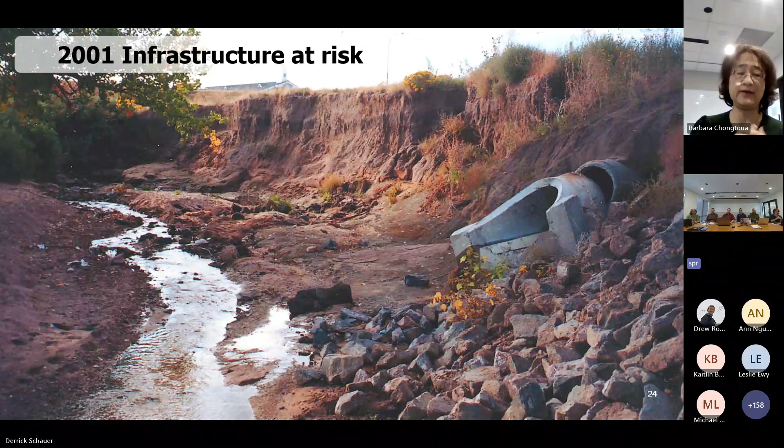But as you'll see in this next slide, by the early 2000s, late 90s, we started to see some erosion surfacing on Marcy Gulch, which resulted in infrastructure at risk shown here. As the channel lowered, and Troy's going to speak to this in a little bit, it lowered first, then it widened and started to stretch out. It started to threaten property, both public infrastructure like trails and utilities, but also private property. You can see the homes, although set far apart from the creek, are still close to it.

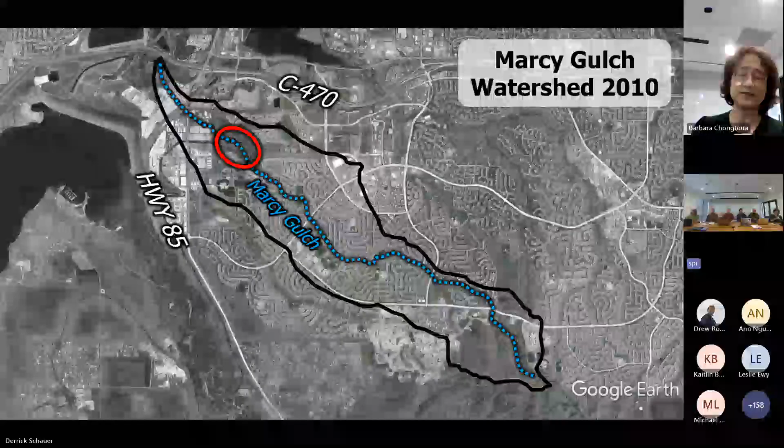You'll see in this next slide, we saw these early symptoms early on, but in 2010 everything kind of came to a head, in this area shown in red, after a significant period of rainfall. In this next picture, we basically lost the channel.

With the channel, what happened is with that storm, it cut down and it widened, resulting in a channel that really was no longer prepared to continue to convey floodwaters. You'll see in this next photo that a lot of infrastructure was lost related to this. The High Line Canal is that flume you still see standing, although it was damaged and wasn't operating as a result of the storm.

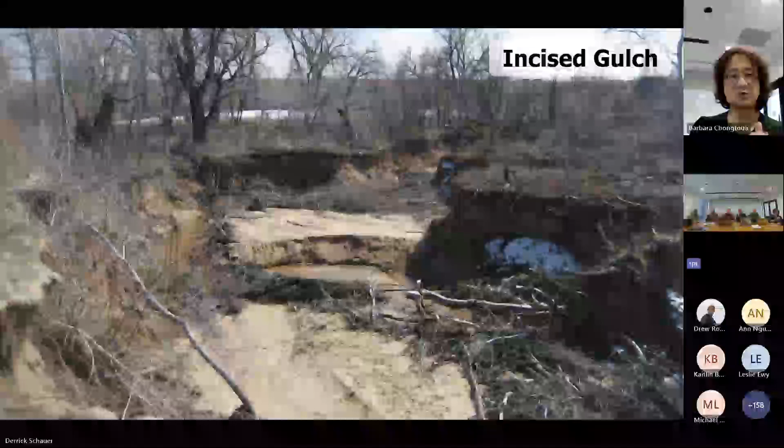You'll see in this next photo that we did lose vegetation because of this incision. You can go to the next one with uprooted trees, and then the next one as well. With this event, it moved even closer to private property.

We did take action and address this problem, but this is the watershed responding to increase in density, more people, and increase in how people are creating habitat in the watershed, which brought in more driveways, more rooftops, more roads, more imperviousness, which means that Marcy Gulch, which didn't experience many flows in its historical setting, now was seeing flows with every summer thunderstorm that was coming through.

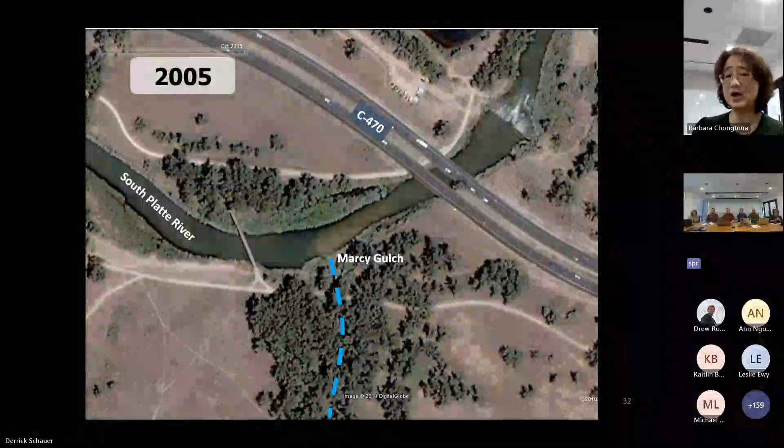You can see with this next photo that this really came to a head. South Platte River kind of told us the story of Marcy Gulch, because you can see the chocolate milk there at where Marcy Gulch ties into South Platte River. In 2005, you start to see some chocolate milk, which is an indication of mobilization of sediment due to erosion in the Marcy Gulch watershed.

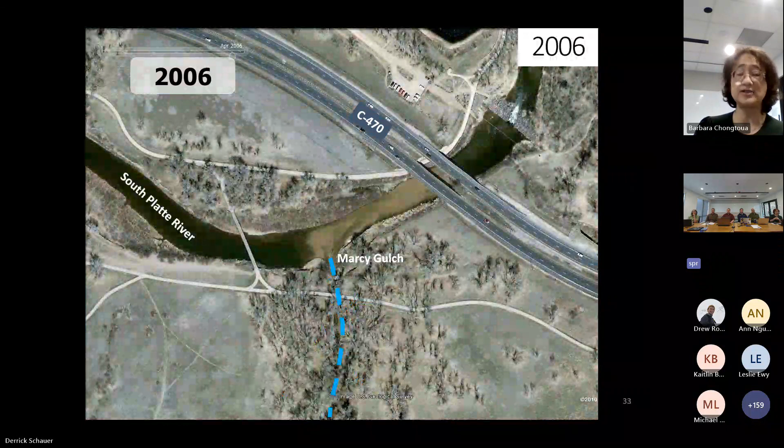Progress through the next two slides, Derrick, you'll see that chocolate milk in 2006, and then in 2008, very significant. Again, some behaviors of this watershed telling us, hey, I'm changing because the watershed's changing, and I'm changing, and actually I might not be able to handle the conditions that I'm put in.

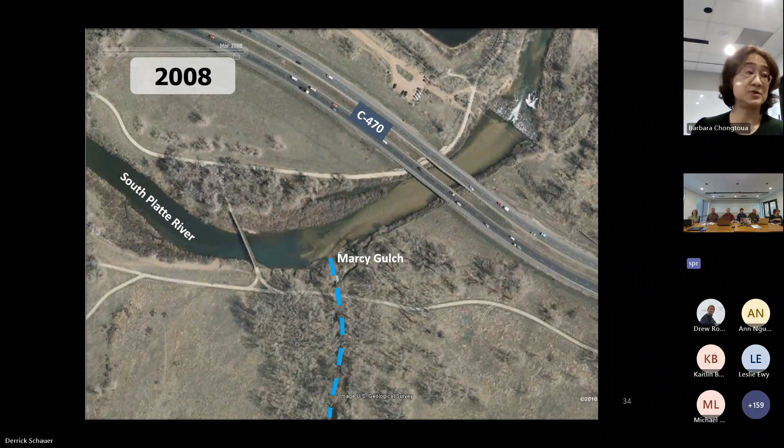So this next two slides, some of the things that we think about with floods, I just want to point out two ranges. There's the range of events where we experience it every summer. Our typical summer thunderstorms, we all experience it here. We know what those are.

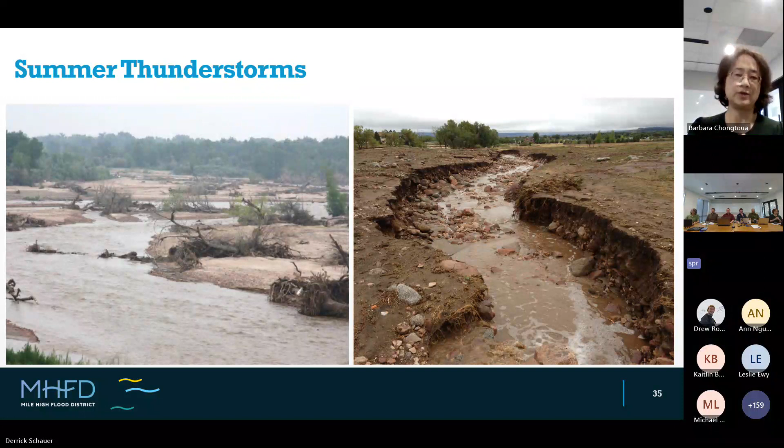When you go to the next slide, I just want to highlight that with Marcy Gulch, the green is what it historically saw as a peak discharge for a typical summer thunderstorm. In other words, it was very unnoticeable. The minute you put roads in, more driveways, more rooftop comes in, the peak discharge related to a typical summer thunderstorm increases 50 times. And this is just in peak.

It also occurs more often. It also occurs longer. It also occurs more year-round than it did before. And this is why the watershed changes result in the stream responding, because now it's seeing a condition that honestly it never had experienced before. These are the summer thunderstorms.

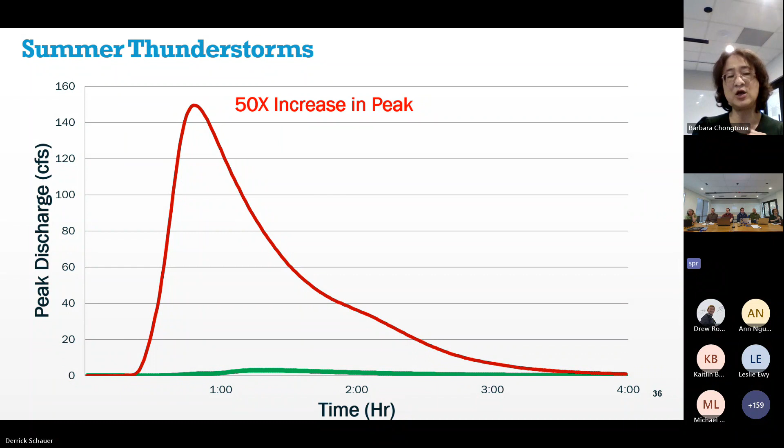If you go to that next slide, you'll see for those events like 2013, 2015, last summer where we had a lot of rainfall in May and June, those floods that impact or cause harm to property, or those that are life safety issues, as you can see with this next graphic, goes up twice. So comparing the green to the red, those events go up significantly as well.

That is why our streams in urban areas are kind of finicky. They're a little bit sensitive. And that's because they are now brought into an era where they haven't experienced this in their geologic past, and now they're having to adapt.

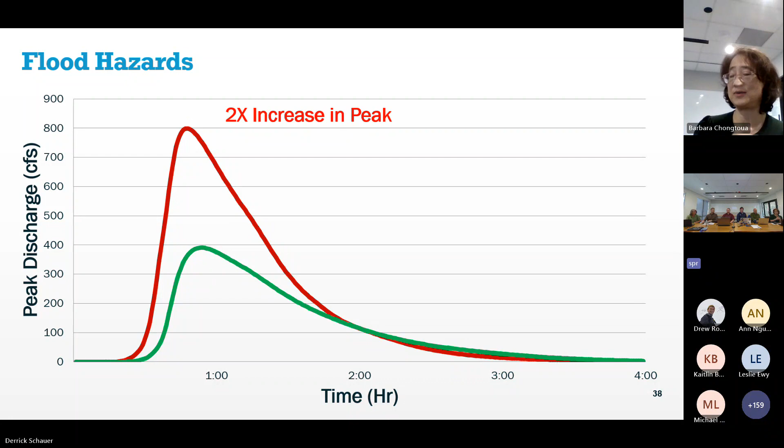So I think with that as the foundation of talking through urbanization and what that means, how the natural environment starts to respond to that urbanization, I think most important and why you're here today is let's talk through, well, how do we prepare our watersheds for this change? Because this change is going to happen. How do we help it prepare, and how do we mitigate for these changes? So I'm going to kick this off to you, Mary, to talk through that.

Okay, do we want to pause and answer a question that came in really quick? Oh yeah, please, Laura. So Cody wrote in that climate change, development standards, lack of master planning were the results of Marcy Gulch, purely due to the increase in impervious cover, or were some other mechanisms at play? The results seem drastic for the size of the watershed.

Yeah, I think, and good observation, Cody. I think for Marcy Gulch, there was a master plan that we had followed with that particular watershed. I think the one thing, a couple of things, and if Jim Wulliman were here, I'm going to be Jim Wulliman with Muller Engineering for a little bit.

I was very intentional in saying flood control facilities. The practice at that time was really peak shaving, meaning you're reducing the 100-year event. We're lucky if we're hitting the 10-year. I don't think in this watershed we even have 10-year control, we have basically 100-year flood control facilities, which meant we were managing the 100-year developed condition back to the 100-year historic condition. But any events smaller than that were allowed to increase, so your 10-year was significantly higher, your 2-year was significantly higher. Marcy Gulch experienced those larger events for the smaller, more frequent storms. The one thing we did mitigate for was the 100-year, but that wasn't enough. That's part one, and that's why we now have full spectrum.

Full spectrum detention is where we are managing all of the events to its historic or existing condition. That's part one. Part two, Cody, is that the approach for Marcy Gulch was regional detention with some grade control structures, but we generally stayed out of the gulch, thinking at that time we were doing the gulch a favor by not putting in a lot of armoring and structures. What we learned from Marcy Gulch is it's a sandy system, it can't handle a lot of water. Even though we're providing detention for that 100-year event, we're allowing all the other events to hit the system raw, and without much infrastructure in Marcy Gulch, it unraveled. That experience with Marcy Gulch has informed our standards today.

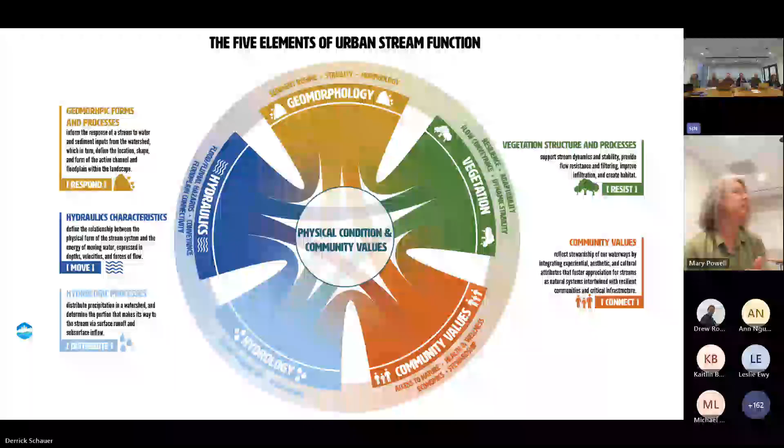And then finally, vegetation as a very important aspect of stream function, and ways that vegetation can work in projects that hadn't previously really been considered. And so I think the first... Do you want to touch on the honorary 6th element? Mary just mentioned that in preface to Brent, the multidisciplinary team. Oh, sure. Thank you, nice segue. As part of recognizing this new approach, we recognized as well that in the past we had engineers on design teams and a lot of planning teams that focused on the H&H.

As soon as we started talking about community values, geomorphology, vegetation, we very quickly recognized that we needed to bring more people to the table during the planning process, during the design process, and even during the construction process. And so that recognition really led us to stressing the importance of high functioning teams as well, not just streams, but high functioning teams through a multidisciplinary approach. And Brent is going to take you on that journey here now.

Are you ready? Later, he's... I'm gonna talk about it later. I know, I'm sorry. It was a really nice segue though. It was. I had it in mind for later. Yeah, it was really nice. What we're going to do right now is take a little break. Do you want to do it now, Laura, or do you want to wait? Whenever you guys, we're only half an hour in, so if you'd like, we can go a little bit longer. Sorry, no break for you.

All right. So I love this image. This is right around the National Western area. You can see the old wastewater plant in the foreground for Denver there. Now, this area has changed. I want to say this image was in the 30s. And I love this image because it illustrates some of the points that I love to make about urbanization and about how our drainage infrastructure adapts. And of course, there's been a lot of press around the South Platte River these days. Some of you may even be working on this area of the river now.

What I love to see here is this is again illustrating that definition of urbanization, which is, the first part is you've got more people moving into an area, and the second part is how we adapt. How do we manage our world around us to adapt to more people? And so you can start to see things like roads and railways, and in this case, all of the stockyards in the foreground. So what does that do? Well, we've straightened our rivers. You can see in the foreground, we've channelized and straightened, we've smoothed things out. We've completely changed the way the South Platte River was working. And so that means that we are adapting our natural world around us to help us with the urbanization.

Yeah, go ahead. Go one forward. There you go. For all of you out there in the audience, we had clicker problems. So Derrick is our official clicker here. Thanks, Derrick. You do a great job too.

But again, going back to this idea, and you can make this one quick, the idea that the more we urbanize, the more we're managing, and the more we manage, the more we urbanize, because people are attracted to that, and it just kind of cycles into this loop. Go ahead to the next one.

It depends. Yep, good. 25, 30. 50 years. I see a 50, 40, 30. Nice. Excellent. You guys, you're in there. 30 is the closest, to be honest. Yes, there is some infrastructure that can survive 50 years, but let's say it's 50, just to be positive about this.

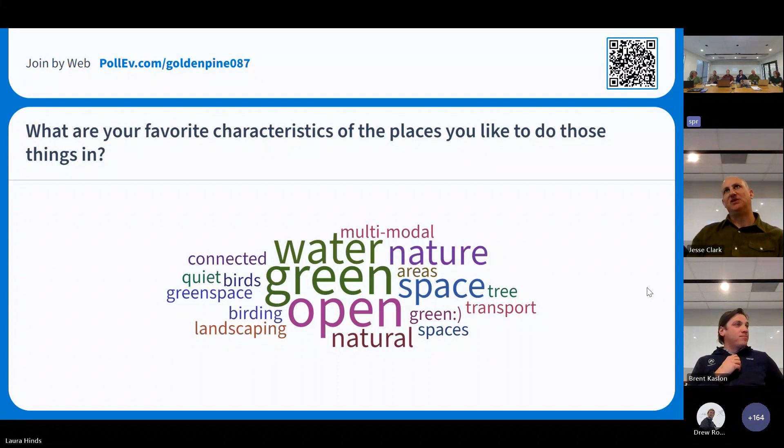So the next one is about stewardship. Hopefully. There we go. So what kind of things make us want to take care of those places? And my guess is that it's going to be related to the fact that you want to preserve those very characteristics that you just described. Community, nature.

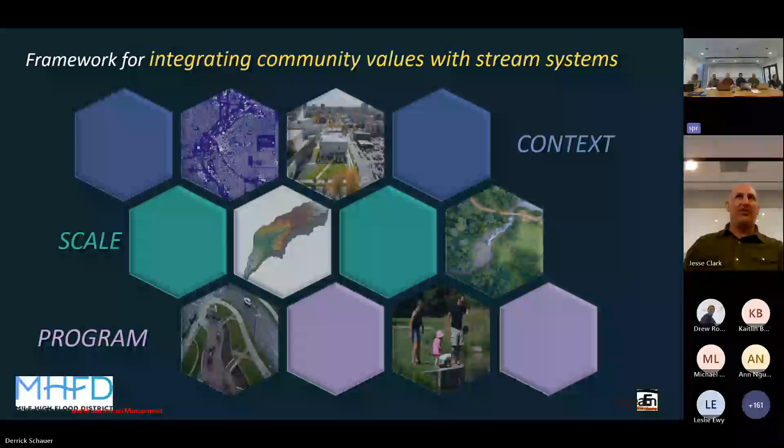This is really an important way, and I also want to apologize. Some of the colors came through really funky on my slide generation, so it might be hard to determine these, but I like to use these 3 buckets as a matrix for things that you're balancing when you're considering how you're planning for space, how you're designing for drainage infrastructure, and how we're essentially implementing urban infrastructure to carry water through our communities. The first is that idea of context. The second being scale, how big or small, and the third being program. So go ahead and go to the next one, Derrick, if this works.

Okay, good. So context really speaks to a lot of things, right? And I want us to start thinking about it's beyond just roads. It's beyond just about how we get through it, although it includes that. So transportation, access, circulation, these are really important things. People like to move from one place to another. It's also about our architecture and aesthetic. It's about the materials that we're using and the forms.

I recently just got back from Cuba, actually, and I can tell you that there are just some amazing contextual cues in Cuba. Despite the condition of much of its infrastructure, there are these beautiful aesthetics that really inform all of their infrastructure. And that leads to the demographics, right? A lot of different people using our places. So it's important to consider how we're using land use, density, what kinds of things are already there. Existing program is a really important one for us to consider when we're developing new infrastructure that might support or feed into that existing area.

Next one. So when we're talking about scale, we can think about scale in a lot of different ways, right? It can be related to just the waterway, whether it's a first-order stream, this tiny little trickle, or all the way down to a large river. But we can also start to think about scale in terms of our demographics, in terms of our development patterns, right? Rural, suburban, and urban or ultra-urban development.

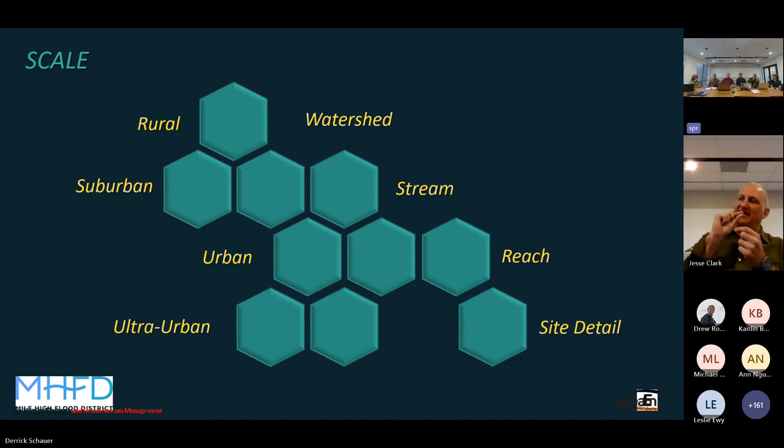There's a completely different scale of both the objects in space, buildings, the scale of our roads, the scale of our infrastructure. All of these things are important to consider when you're thinking about whether we're planning for space, right? Are we reserving enough space for all of that to happen? All the way down to the details of every nut and bolt or finish of the concrete that we're talking about, or the craftsmanship of the masonry that develops into a wall or an outlet structure or something like that.

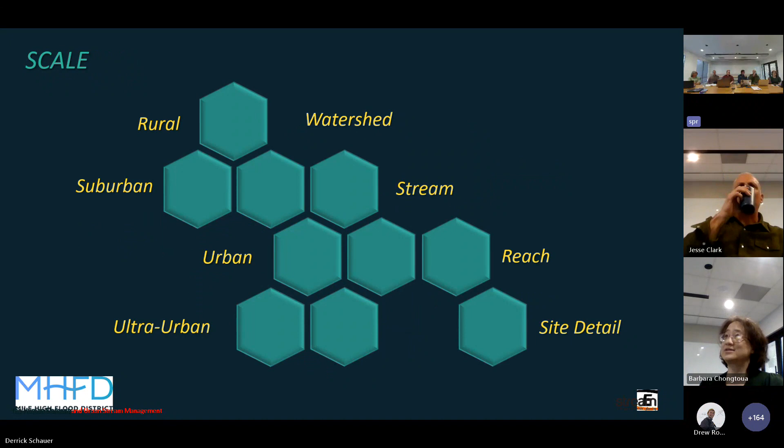Okay, next one. Can I just add a point there, Jess? Please do. I know working with my Denver Park friends, as well as my Adams County Park and Open Space friends working on projects, especially along the South Platte, this question of scale comes up a lot because, like in Adams County, the question of, okay, we're doing an improvement to the South Platte River, but it might actually be considered a regional park. It's a regional destination.

And so therefore that informs, and here we're talking about a stream restoration project. We're having this conversation of what is the purpose of this improvement. And it's going to be a regional park and open space. And that informs the type of amenities that we might want to include to make sure that we're meeting that marker. And so I think that's, to your point, Jess, where scale comes in.

Like in the South Platte River, in the Denver piece, with my Denver Park friends, that same discussion comes in: it might not be a regional location, but it might serve as a neighborhood park, an open space, which informs, again, the scope of design. So I just wanted to illustrate what that point means, even when it starts out as a stream restoration project. And that's typically where it starts out, but I just love the conversation that Jess takes us in, is really, what is it first and foremost to the community? Yeah. And it's not a stream restoration project to the community.

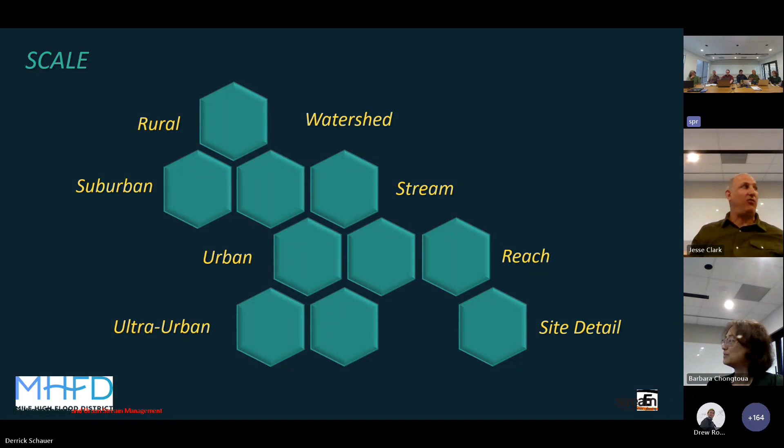Yeah, and I know we're going to touch on this more later, but the number one thing that we're seeing related to scale, it's not enough space. We're not giving enough space to this kind of infrastructure so that we can allow for all of these other functions to occur. If we don't allow for that, then we're already boxed in. And so I know we're going to touch on that later, but you go to the next one.

Thanks. So program, we hit on this a little bit, but I also characterize this into 3 different ways: active, passive, and indirect. So active program, this is like you're actually bringing somebody to a program and you're actually asking them to act. It could be as simple as they're asked to do something, complete a survey, kick a soccer ball, whatever it is. You're actively participating. Passively participating in something is, I saw people were talking about birding, hiking, those kinds of things. You're engaging yourself into that area or that part of nature, but you're passively experiencing something.

And then there's the indirect. It's almost like the piece of experience that you don't realize you're experiencing, but it is still impacting you. These are things like, it could be lighting, it could be the smell, it could be the temperature, right? You could come up on something that just really doesn't feel good and you don't even know why. So these are just big buckets to think about program. Go to the next one, please.

You get precipitation in a condition like this, which we're going to call the natural condition, with a lot of vegetation, trees. That precipitation is then captured through interception on the leaves or depression storage.

If there's little undulations within the environment, you get that depression storage. Evapotranspiration is another big one where the plants use the water and it evaporates through their leaves. Infiltration is a really big one with natural environments. When you get that precipitation, it slows everything down before it gets to a stream corridor, infiltrating that water, providing deep percolation and groundwater recharge. But in the case we're looking at today, it's really about the runoff. That surface runoff is reduced when you have this pervious area.

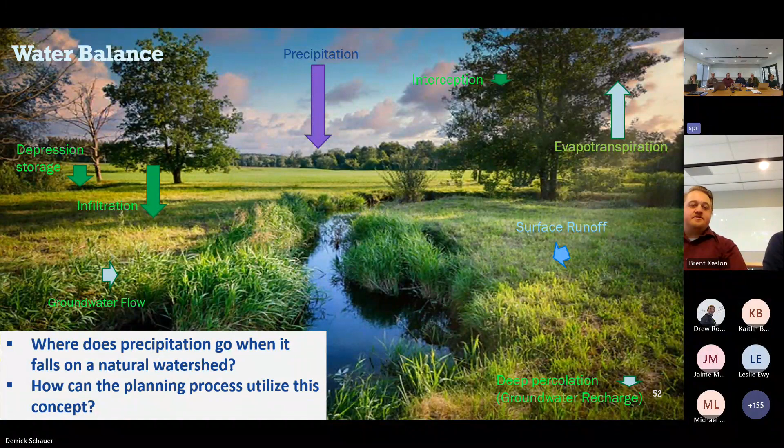You don't have to answer these questions in the chat unless you want to, but these are the things that as a water resources engineer I'm thinking about when we start looking at a development or a project. Where does that precipitation go when it falls on that watershed? And how can the planning process utilize this concept? This is where that multidisciplinary team and getting all of these other experts in the room, that question can be answered.

So then when we transfer and start looking at urbanized areas, what are the results of urbanizing an area? You have that same precipitation, but reduced evapotranspiration and reduced depression storage potentially because you don't have the vegetation there. When you start covering the landscape in concrete and these impervious surfaces, you're reducing that potential for infiltration, evapotranspiration, all these things that slow down the surface runoff.

And then on the flip side of that, all that precipitation turns into surface runoff. As Troy mentioned earlier, it's not just the peak flows, but it's the volume. You start getting increased volume for smaller storm events, and then you have to really manage that increased flow.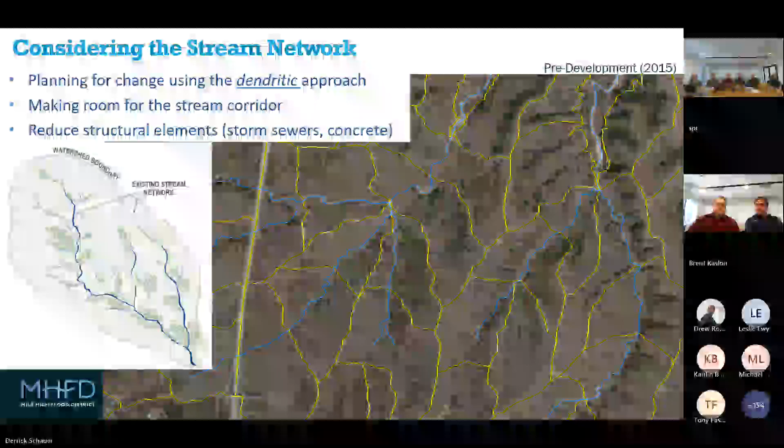Go to the next one. This is that same photo, but partially developed. So you can see what this area is turning into and what the watershed is turning into.

One thing we were able to do here, working with the developer, was preserve those stream corridors and utilize the topography in this area to help with drainage. Those blue lines you see are generally undeveloped, and we've kept those in place and modified them as needed.

Brian, those are mostly intermittent or ephemeral streams, right? So the point being they weren't just overlot graded. Yeah, absolutely, these are intermittent streams that generally only run when they see storm events. But the frequency of those events is now going to increase, since we've got increased impervious area from the roads, houses, and developments.

So the next thing when you start thinking about the stream corridor itself is that horizontal shift, which is what Troy mentioned about allotting space for that stream corridor. But then the next step is really figuring out where that detention is going to be.

It's easy to just put a large detention facility at the lowest point of the property and kind of put it out of the way. But what we found is that actually leads to more consequences and issues down the road, especially for the upstream system that doesn't have any detention.

Yeah, and the last thing I'll say, then I'll turn it over to Troy—like I said at the beginning, this is a really important concept. Even if you're not the expert on hydrology and hydraulics, it's really important to know this, because then the next thing that happens is once you have an understanding of how water is being distributed throughout the site, it comes down to those stream corridors Troy's going to get into, and allocating that space and understanding from a geomorphic aspect where your conditions will change in the future.

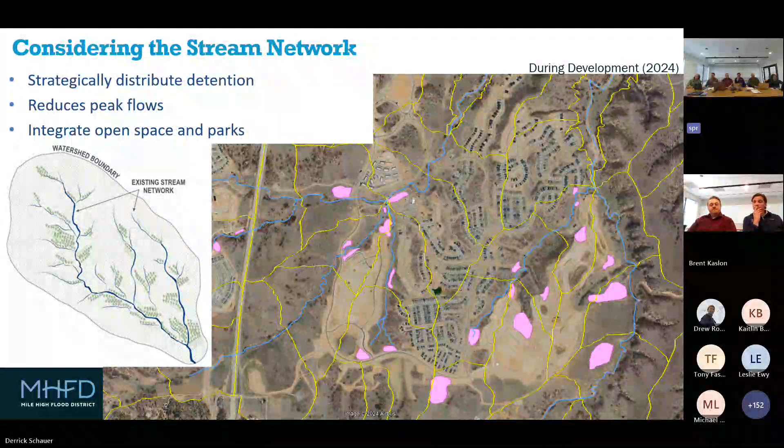We did have one quick question. Do you want to jump back to slide 53? Brian, they were asking—I'll just read it—in this urban situation, did this urban site include a solution where capacity needed to be expanded among the other design goals?

So this is not a project that I worked on, but I like this question, because what this shows is there is no space, right? So if there was a point down the road where you needed to expand the channel here, you don't have the room to do that without then taking out some other amenity, whether it's the plaza space or there's a little seating space over on the right side of the screen. So a perfect example—I appreciate the question—is if you go this route where you're not allocating that space within your corridor, you potentially end up in a situation where you're now having to remove amenities down the road because of the change in condition or the impacts of urbanization.

And I'll just add, Ryan, that's why we also then end up with a lot of buried infrastructure, because you've got more water coming in. You still have to mitigate that water. You can't have more water come into this creek here. That's where a lot of times we see underground detention crop up, because, well, how do we reduce the peak coming in so that we don't have a capacity issue at the channel? Not having the right amount of space everywhere just compounds the issue, because now you end up with unnecessary infrastructure littered throughout your watershed.

Yep, and Jeff asked, what about the depth of the channel? That's definitely an option, but you can only go so far, right? You can't dig out another 10 feet of this channel just to provide that extra capacity without potentially impacting something else, or then having to shift where you now have concrete walls. And then we're in the condition that Mary showed earlier, where it's a much tighter flood control system, and that's the only benefit you're getting.

And I would say that Jeff's question, that's definitely an 'it depends.' Because could you? Sure. With enough money, you can almost do anything, I suppose. But there might be existing infrastructure underneath the channel that you can't go lower than. There might be experiential benefits you're going to completely sacrifice by going deeper and narrower or having vertical walls. You might disconnect all of your vegetation from the natural hydrology, and so now you're either increasing the requirement for irrigation or completely obliterating any possibility for natural vegetation to exist. So again, it depends—it's those knobs and levers that you're turning.

And are there examples of lowering the channel? Absolutely. We're seeing it here in Denver. The South Platte River in some places is going to be lowered 14 feet or something like that, right?

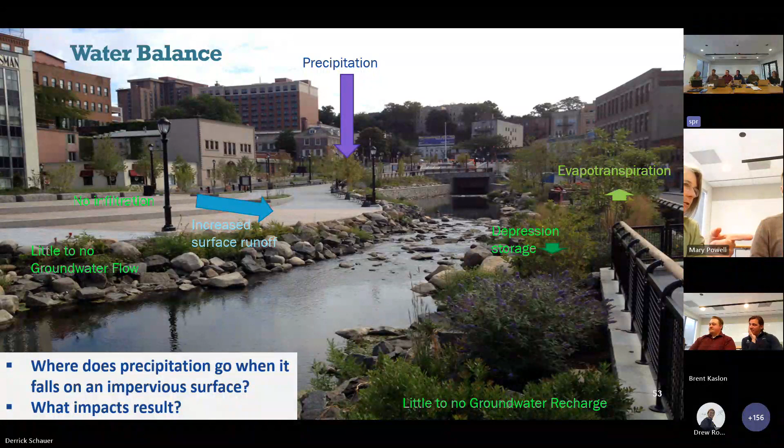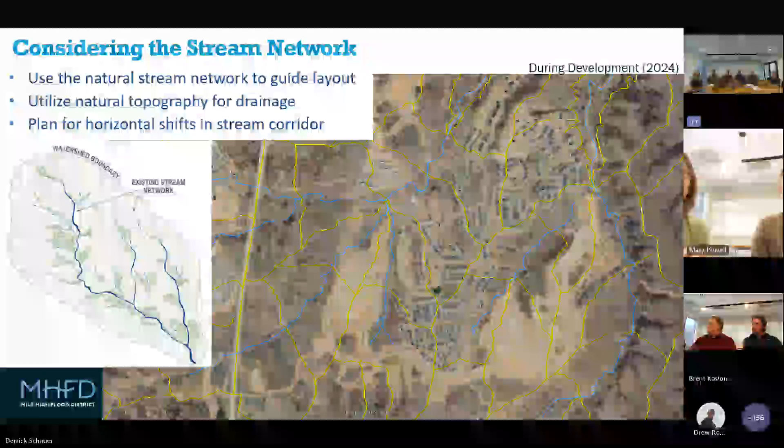One of the things the district is trying to work on is when we do get the space, we recognize that over time, additional stressors will be added to the system as development gets built out. But we're trying to come up with a way to only make those changes or protect those areas that are critical at the start. And then over time, we provide the opportunity to go in and be a little more surgical in addressing points of erosion. Instead of redoing the whole channel the way we used to, we're going to wait and see how it responds and address things as they go.

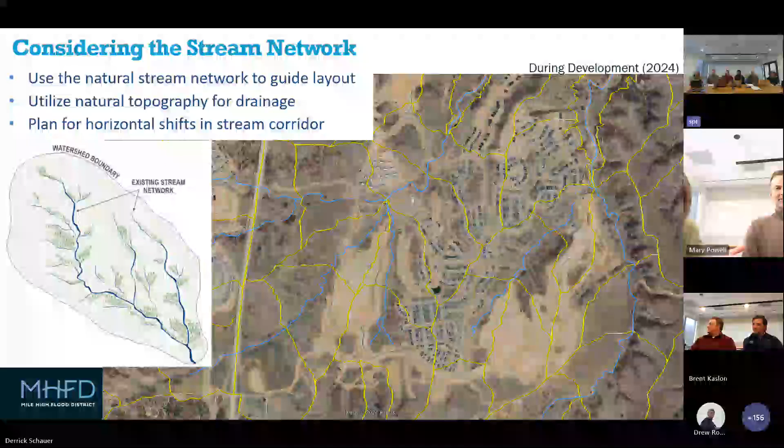So all these areas, we want to make sure we're really clear. We're not just giving it space and letting it go like Marcy Gulch. We definitely have an adaptive management plan in place that says if we see this, then we do that. Maybe it's a riffle structure, maybe it's a bank stabilization. At some point over time, maybe the whole channel does end up getting redone, because it just can't do without all that work. But let's wait and see a little bit, as some of our newer approach. So, yeah, that's it.

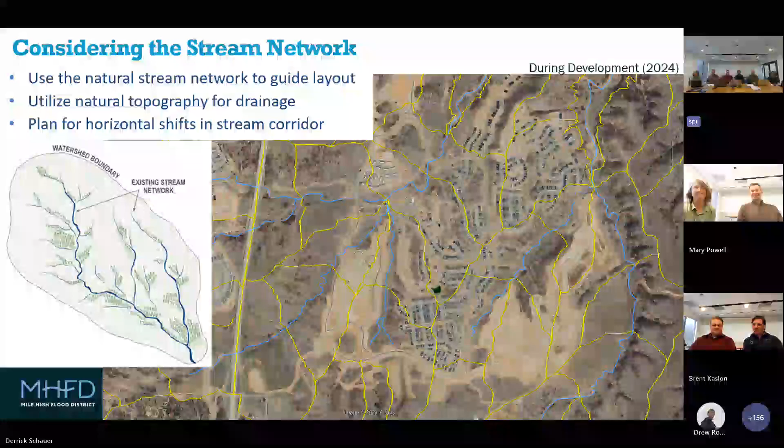Who's next? There is one more question. Do the planners, engineers account for the design storm event, the 25-year, the 50-year, the 100-year, when they do stream restoration? Yeah, so that's one of the things that we look at, and I think Troy, either today or tomorrow, you're going to get into this in more depth. But one thing that I'll mention about master plans, from an engineering standpoint, it's really difficult to predict the future with a master plan. Like I said, we have existing impervious values and proposed impervious values.

But a lot of times what we're doing in a master plan is we're trying to provide guidance on what that channel may need. That doesn't mean that the master plan is the solution, right? And I think that's really important to keep in mind: when you're doing a master plan, you don't know what's going to happen in 5-10 years. And a lot of times a new one doesn't get done for another 10-15 years, depending on the site. So understanding that it's guidance, not the solution, is really important. But those storm events are one of the primary things that we do look at.

And I just want to expand on what Ryan says regarding district master plans, is that we'll identify the problem and we'll identify the action or the intent to address the problem. How you get there is not prescriptive. So we might say we need stabilization, but we're not saying we need grouted boulder stabilization versus a concrete channel. I think that needs to be left vague so that it can be defined with time, because technologies and tools will change, to create planning documents that live on the shelf better. Thank you for bringing that up, Ryan.

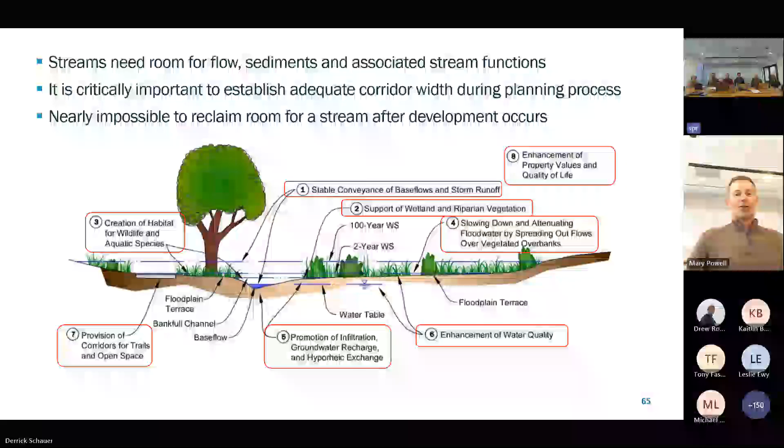All right, now we have sort of a different category, and these are more some of your environmental types of things. Over on the left, we have number 3, creation of habitat for wildlife and aquatic species. Some of the earlier photos you had seen of the reactionary concrete channels obviously aren't providing those types of functions, but they really are important for systems that we're trying to create. In the middle here, number 2, support for wetlands and riparian vegetation. Mary's going to talk about vegetation a lot more, but obviously there's benefit from active, passive recreation, from just stability. And so we need to provide the room to be able to allow that.

And then down in the lower right, enhancement for water quality. That's really an important function of a natural floodplain. So the more that we can mimic those by providing room for streams to act like streams, the better off we're going to be. Advance that, please.

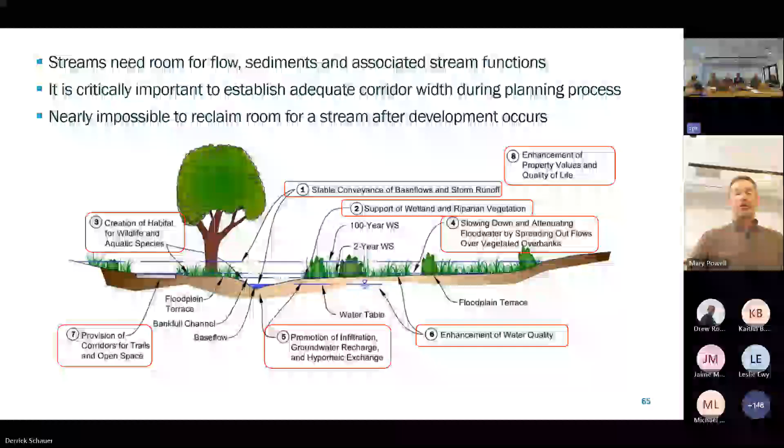And then lastly, we've talked a bit about some of the human element. Down in the lower left, number 7, provide room for, let's say, corridors and open space or parks. Those oftentimes coexist with some of your stream corridors, a great thing. In the upper right, number 8, enhancement of property values, quality of life. Ryan talked about how by creating these spaces, we really are creating something that has not just the aesthetic and emotional values to it, but there are some property values, quality of life type of benefits we get as well.

So the big takeaway I would have from this slide really is that the room is required for a lot more than just conveying water, and the more that we can think about that in the planning process, the better off we're going to be. Next slide, please.

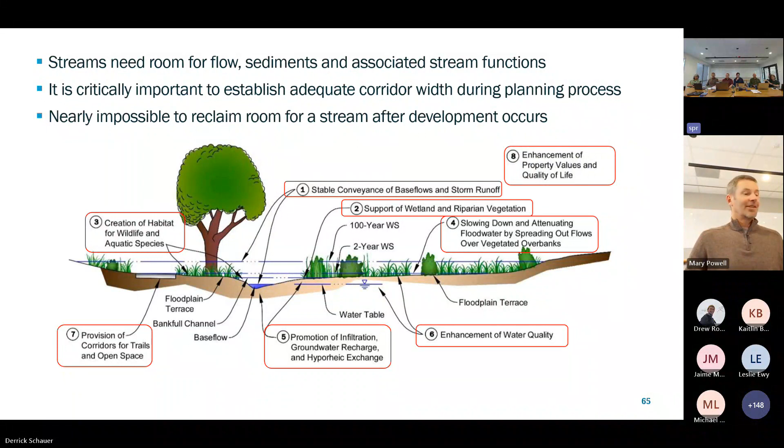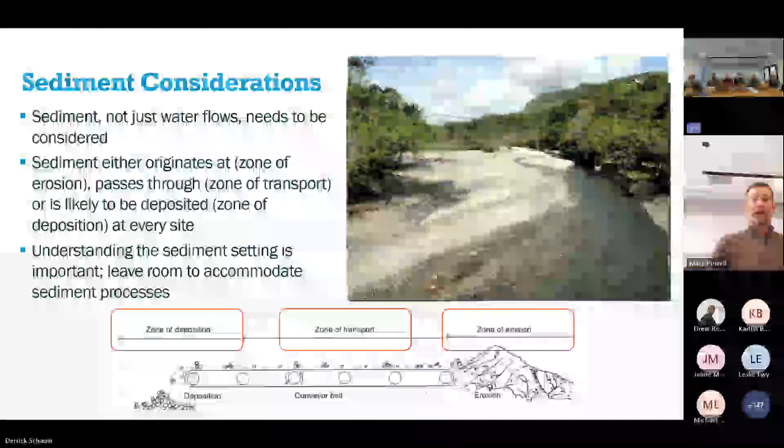There'll be some of both of those, but generally the sediment is moving through. And then advancing, please. The zone of deposition. And so this is the area where you're actually seeing a lot of direct responses from your sediment. So the sediment that's being transported from upstream is going to be dropping out. You might think of alluvial fans, but you can think of those on very small scales as far as, in a lot of developments, the downstream end, oftentimes you're going to see areas that there's a tendency for sediment to want to drop out. And an important piece in planning is to just understand where you are in this conveyor belt so that you have a reasonable expectation of what the system is going to want to do.

Next slide, please. Do we want to provide a little space for questions? For anyone who has something they just have to get off their chest before we move on? I do just want to say, did someone chime in or was that? Well, it might have been you. Okay. There was, but feel free to go on.

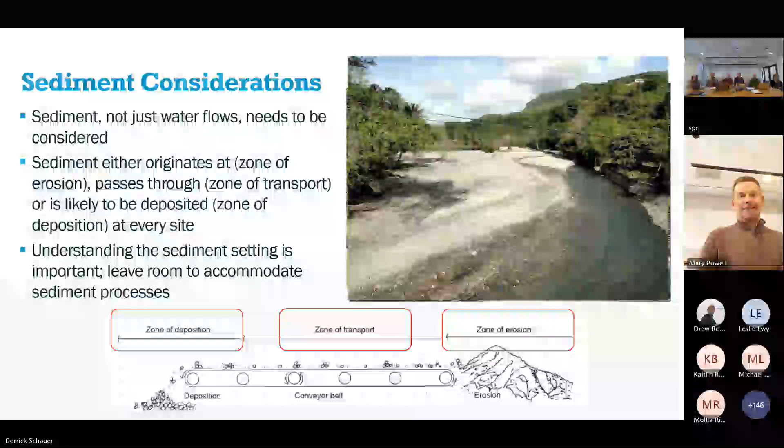No, please. Okay, there was a question asking, on the stream channel width slide, are the green circles where the meander stream bends riprap bank stabilization? If you don't mind going back up a couple. Green circle. There we go. So yeah, this sort of cartoon is showing what the different velocities are in the stream. And in this case, those green circles are actually areas where we have deeper pool habitats.

So if you think of walking along the profile of the stream, that's a deeper section of the channel. We did find that on some of those areas, on what would be the outside bend as the water is making its way through that corridor, we did have some buried void-filled riprap that was then planted. And that's all part of the balance of you want to make it natural, yet you need to make sure that it is controlled enough within the constraints that you're setting for it. So it was a combination of natural type plan view and profile of the stream with some engineered constraints to make sure that it doesn't just move beyond the limits of what we're allowed.

There's another question asking if the zone of deposition is typically the curvy part of the river. Not in the context of the slide that shows the three different zones. Generally, that's thinking more larger scale, where you are correct that in the tighter bends in a river, typically you'll have some amount of deposition that'll occur on the inside of those bends and maybe some erosion on the outside. But the idea of the conveyor belt is bigger picture. It's more thinking about you have some upstream area that's a source of significant sediment, some sections of stream that generally sediment is transferred through, and then some downstream areas that you get more deposition.

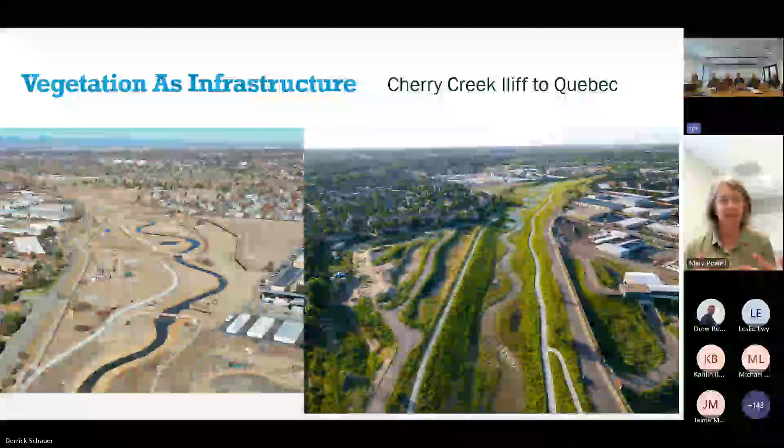And I do think it's because we're looking at the system as a whole. We're not trying to shrub it up, as Jesse and Brent and other landscape architects sometimes like to say. We're not trying to just come in at the end and greenwash it. We're actually incorporating the vegetation as part of the structural element in the design process. So that's what we're trying to speak to here.

Next slide. One really critical concept in thinking about vegetation, as opposed to the hardened, more traditional engineering design, is this idea about resiliency of our materials. The overall concept is fail safe versus safe fail. On the left-hand side in state number 1, imagine that you have a little ping pong ball and you put it in a curved cup, and gravity always wants to make it go down into the bottom. That's its most stable state, at the bottom of that curve.

It's happy there. Now, if you're a piece of concrete, or a trapezoidal structure, you're sitting there, you're hard, everything's working, you're completely coherent, no gaps, no cracks, and you will sit there for a very long time. Maybe as long as those Roman aqueducts, if nothing else happens. But that's not really how the real world works.

If you imagine trying to push that little ping pong ball up the side of the slope, you can do that with high flows, or you have to have so much energy to really push that little ping pong ball out of its happy spot if you're a piece of concrete, such that the only way you can really get it to move is if you break the structure. And then it's no longer in equilibrium, but it's also no longer functional. There's virtually no recovery capacity with engineered hard structures.

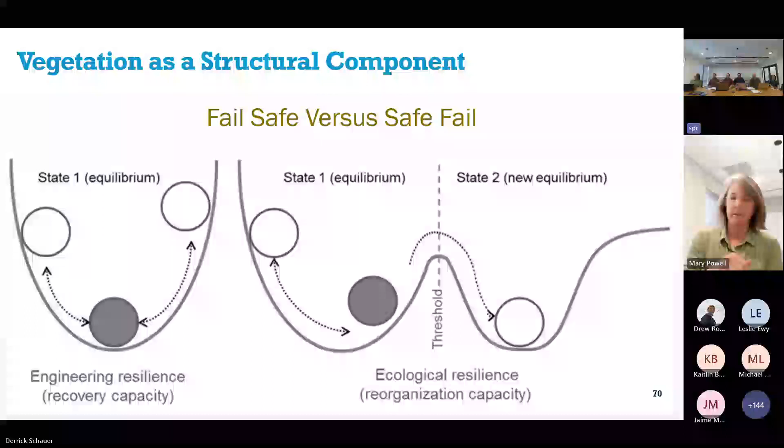This is something to think about when you're using vegetation—where do you want to end up on this line of succession? This is a natural succession state: on the left is bare rock, over time it weathers, turns into soil, seeds come in, etc. When we're doing our designs and planting with vegetation, we're obviously skipping past the first left parts of all this. We have to come in with a community that's going to function right when we put it in the ground and go hands off.

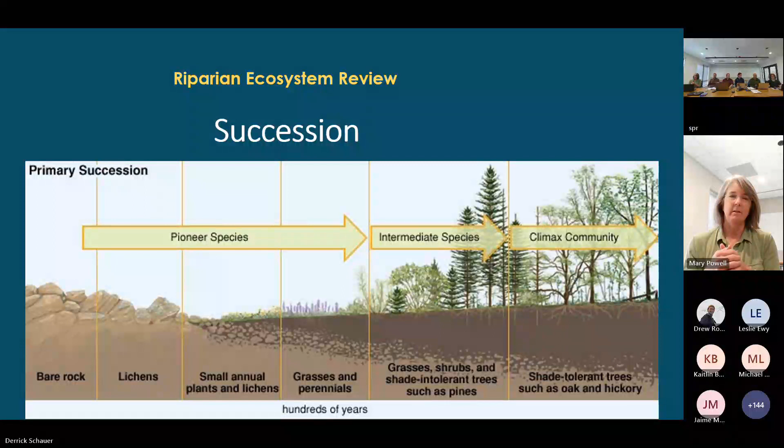So we do have to be thinking about where we are on this successional stage. And we also have to keep in mind that on the right-hand side, that climax community, that may not be where we want our vegetation community to end up. That may not be our highest functioning. That's why we have to go back and reset the clock on the climax, the successional state, with disturbance.

We've removed disturbance from our vegetation system. We no longer have fire, and I'm thinking urban systems—no fire. We're trying to reduce floods. We don't have herbivory like bison and cattle and so forth to reset things. So we have to come in and reset it to our desired condition through maintenance and management of our vegetation. As Brent said, it's not no maintenance, it's low maintenance.